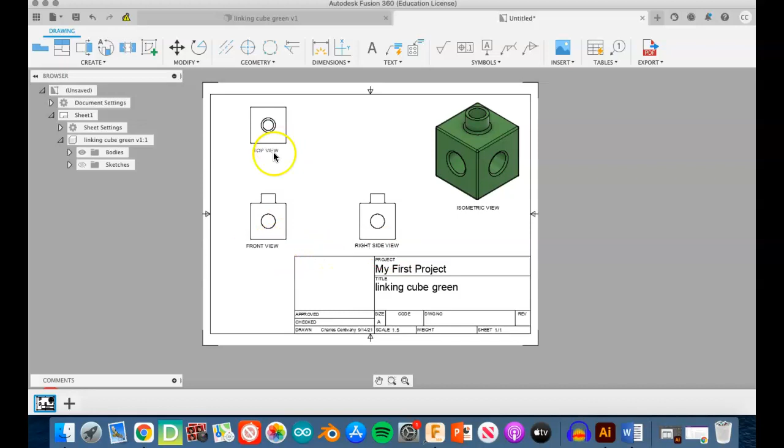So it all starts with something. Together in class, we've made a cube, right? And we're going to make a drawing from this cube. So how do you do that? Well, you come over here to design, and you come down to drawing, and you come over. So design, drawing, over. This little guy pops up. We want to leave everything the same. Make sure your units are in inches, and you want to set your sheet size to 8.5 by 11. You could choose either one of these A's. I'm going to choose the very top A for that vertical look.

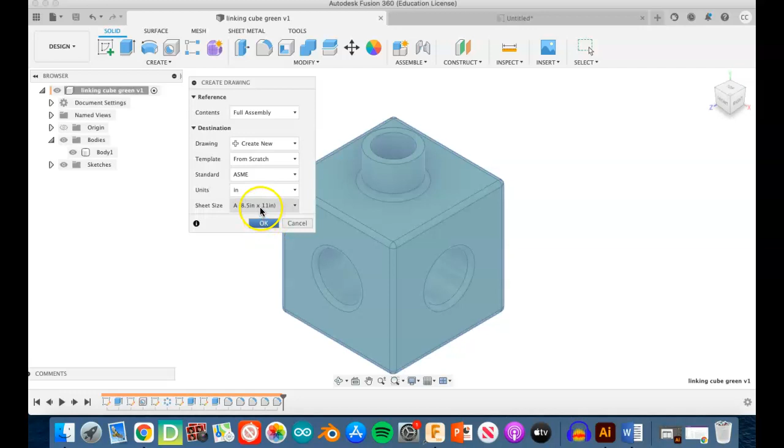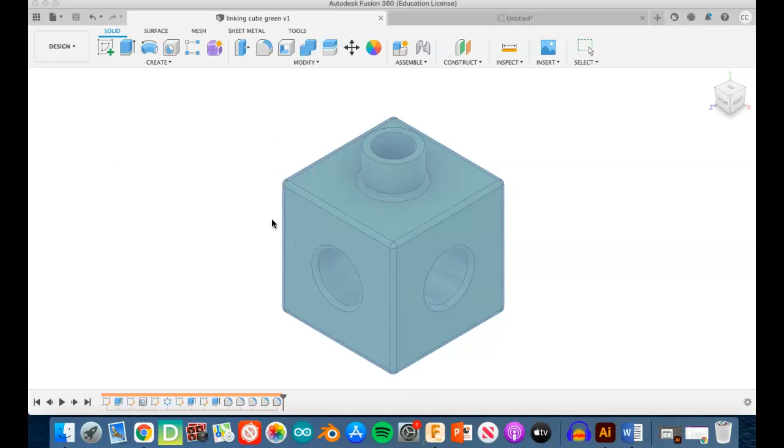Okay. Let's say your units aren't in inches. You can come over to Document Settings, hover over Units, and click on Change Active Units to inches. Once you set that one time, it stays that way until you change it again. So pretty soon everybody will be working in inches, and that will be great. Okay, so here we go. Design, drawing over from design, and just choose that A size sheet. Give it a second. It pops this open. We are ready to go.

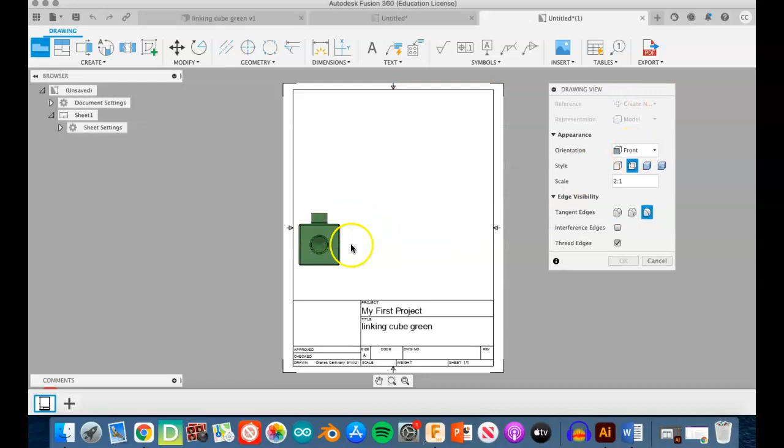If you notice, as I float around in the back, I'm getting a view that's ready to be placed. Like it says place base view. That's what I'm going to do first. If I look at this little window that opened up here, it says it's the front view, which is great. So I'm going to place this down in the bottom left quadrant of my sheet. The style, I want to switch the style to just visible edges, and the scale looks great, so I'm just going to leave that. This hidden edges is a little busy. Maybe we'll leave it on hidden and show you what that looks like, and then switch it to visible edges.

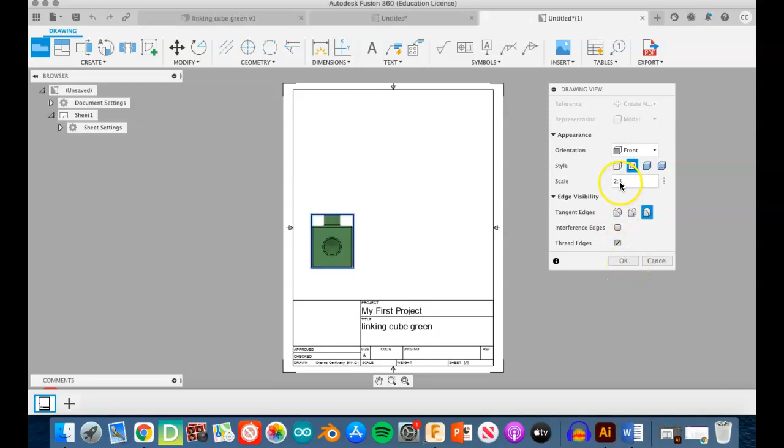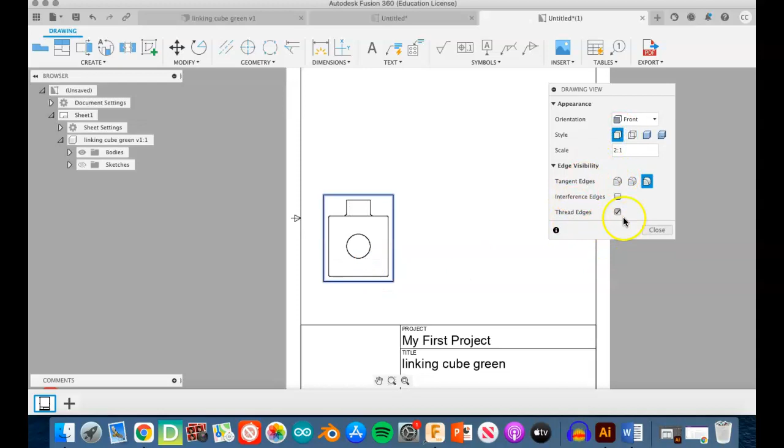So I clicked OK, and this is showing me some stuff. I got the outside, which is an object line, and then the inside, which is my hidden edges. These dashed lines are hidden lines, and we don't really need to see all that business. So I'm going to double click on this and just turn it to visible edges only. You can adjust the scale if you want to, depending on your setup. All right, so I've got one view in. It's called the front view. Next, I'm going to put in a top view, an isometric view, and a right side view.

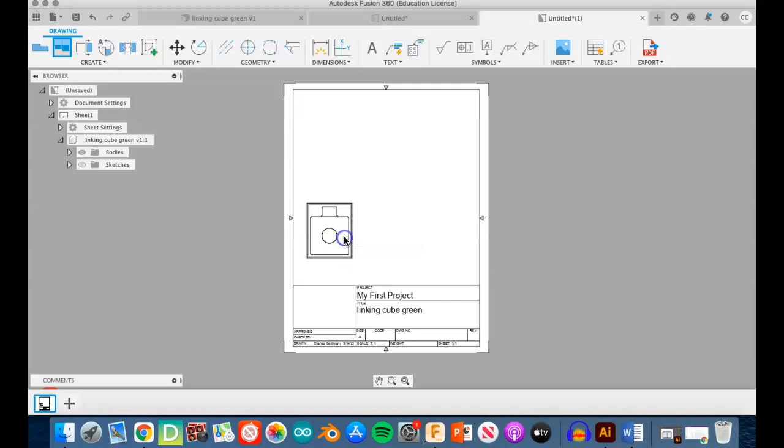Here it goes. Click on projected view here. The hotkey is P. Click on that. Click your view. Come straight up and click. Straight over. Get that isometric. Straight down and click. All right. So all the views are laid out. And then you right click and say OK, or you could just hit escape, or you could hit cancel. All those things will work to get you out of projecting your views.

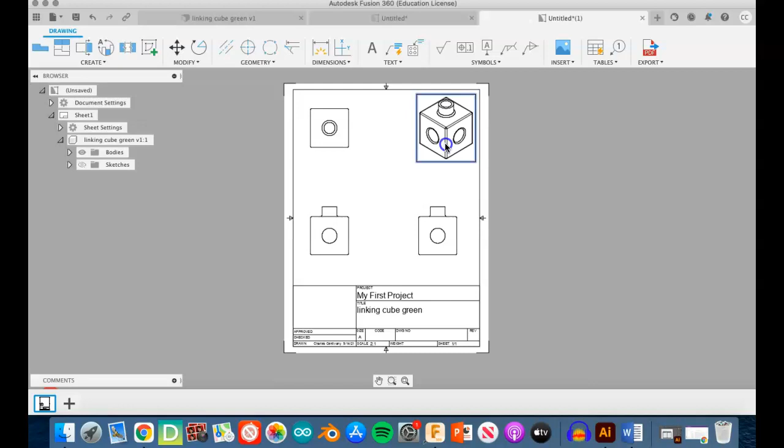The next step is to shade in your isometric view and label it. So we're going to do that real quick. You double click on your isometric view. It makes this pop open. To shade it, you click the little blue cube. And I'm going to change the size a little bit. I'm going to make it 2.7 to 1. And that kind of blows it up and makes it nice and pretty.

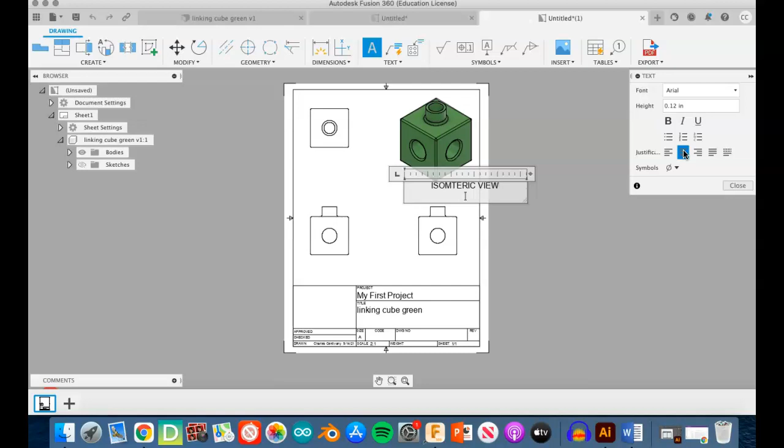The next thing to do is to put labels on all of my views. And so to do that, you turn on text. You draw a little text box. You want to make sure that your caps lock is on. Maybe you have center justification, and type isometric view and close, and then do the same thing again. This one is your top view, close. Same one again. This is your front view, close, and this guy over here is your right side view. Great, close, boom.

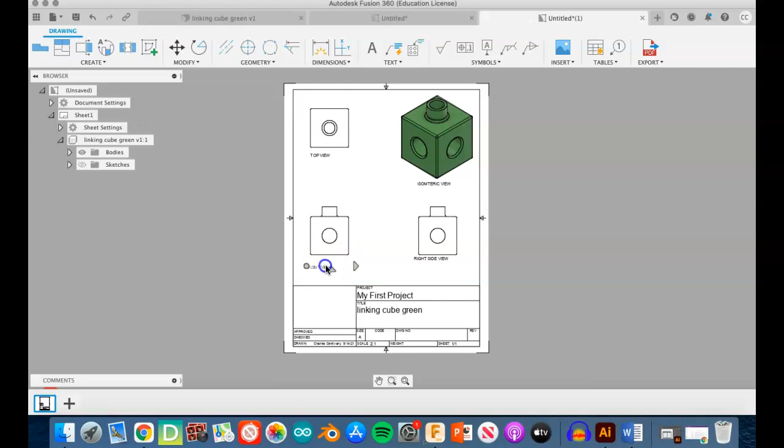All right, and that's where we're going to stop. Let's move these labels right to where they need to be. So we've taken our design, we've laid out a front view, top view, isometric view, right side view. We shaded in our isometric view, and we labeled all of our views. And that's where we're going to stop for right now. Yeah.